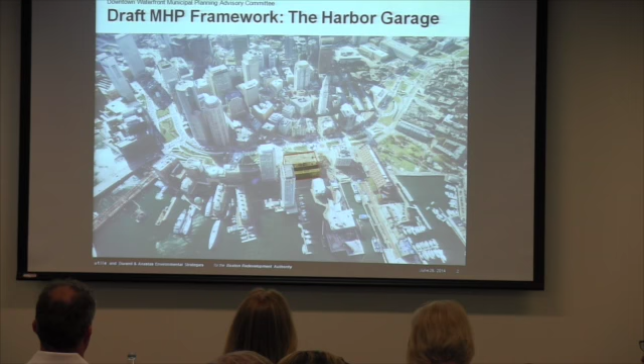Eventually in the harbor planning process, we get to the specific size and height and how close to the water a given project is. Many of my colleagues on the team from the BRA and Utile are part of that discussion. Our job for the harbor plan is to figure out how to convert what you would like to see into an approvable plan.

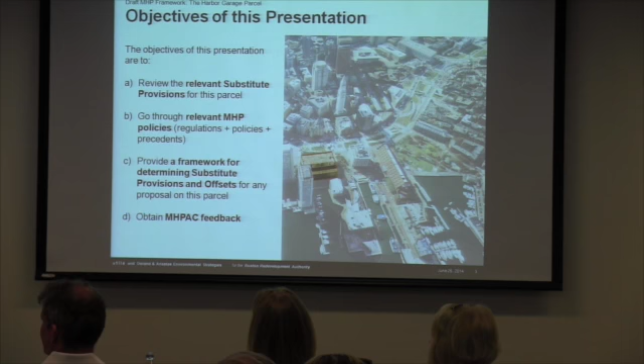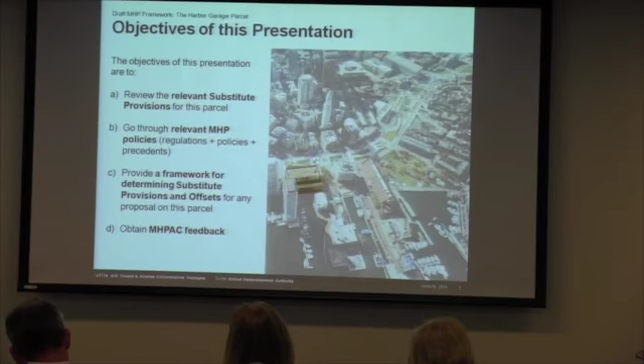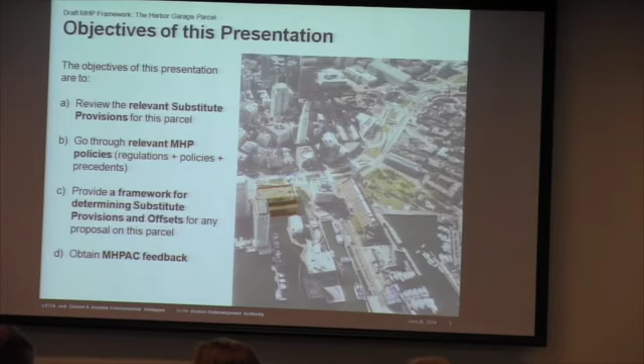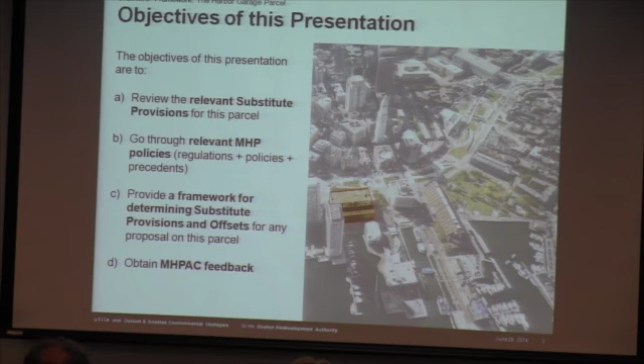Again, one of the questions at the meeting last month was, what do you want from us, sort of as a desperate plea. So I thought it might be helpful to go over the objectives of this presentation. We're going to review the relevant substitute provisions for this parcel. We've done that before, but we're going to do it in a little bit more detail. We'll go through the relevant municipal harbor plan policies, which are based on the regulations and informed by state policies and the precedents the city has established through prior municipal harbor plans. I have 4 slides on the framework for determining substitute provisions and offsets, 2 for open space and 2 for height. Then, at the end or when we have time, we'll get your feedback on the framework rather than any specific proposal.

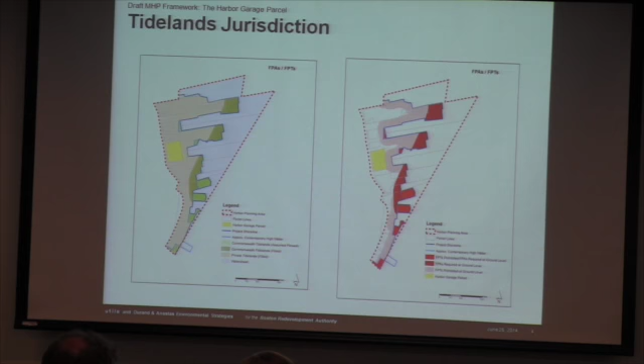In reality, you would probably find on the ground floor of a building like this all facilities of public accommodation, either through the city review process or even through the owner's economic analysis. But from a Chapter 91 standpoint, a large percent of the parcel is not required to have ground floor facilities of public accommodation.

When we talk about the existing conditions, you can see the harbor garage structure right in the middle there. It's a pretty big footprint for the parcel. From city records, the parcel appears to be about 57,346 square feet, of which 57,014 square feet is building footprint, leaving a total of 332 square feet for open space, which is a 99.6% lot coverage. That's quite a bit in excess of what you would normally get under a Chapter 91 application, which requires 50%.

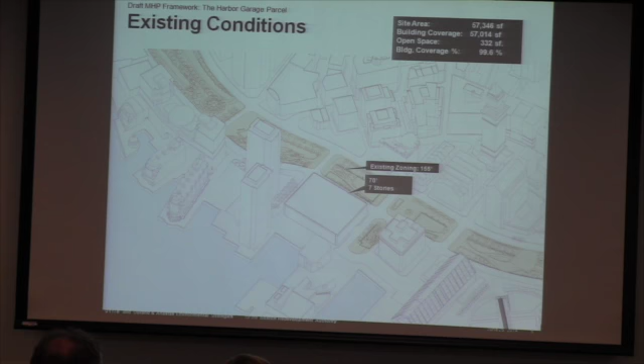In terms of height, the structure is 70 feet tall. Only on the waterfront edge, if this were a Chapter 91 compliant structure, would that be a problem, where height limitations are limited to 55 feet.

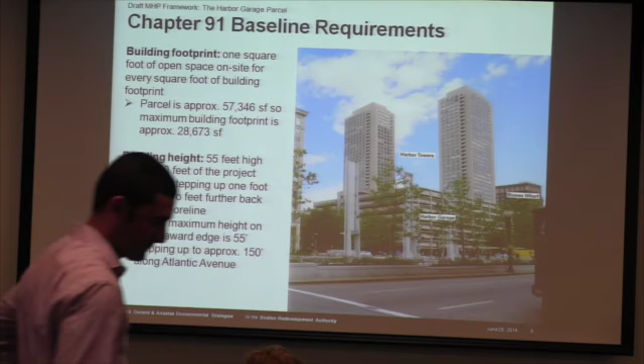Getting to the Chapter 91 baseline requirements and the two dimensional standards that are likely to be in play here. Building footprint we've often talked about in terms of open space. I think it's better to refer to it as building footprint, and we do offsets for building footprint that's in excess of 50%. The regulations require 1 square foot of open space on site for every square foot of building footprint. Where this parcel is a little over 57,000 square feet, that would translate into a little over 28,600 square feet of open space under Chapter 91.

Building height, remember the standard for that is 55 feet high within 100 feet of the project shoreline, and then it steps up 1 foot in vertical height for every 2 feet back from the shoreline. So as you get to Atlantic Ave, the maximum height would be approximately 150 feet.

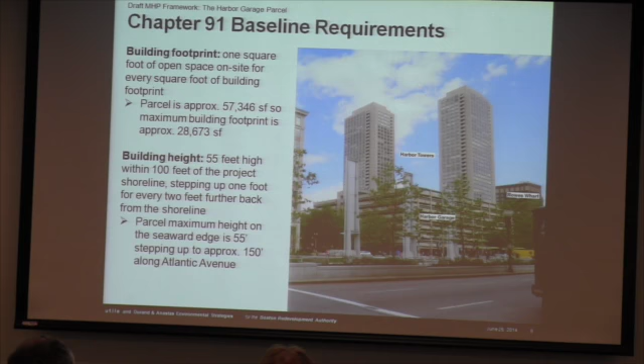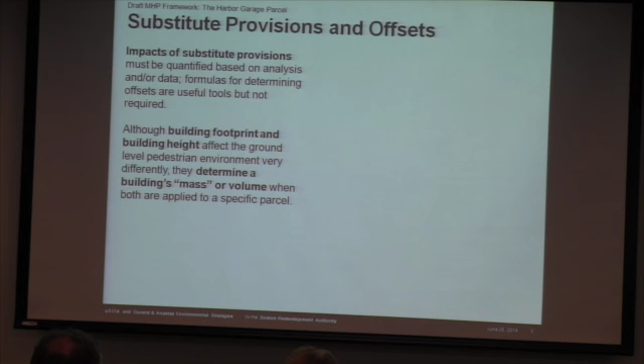Wanted to spend just a minute to go over some general observations on substitute provisions and offsets. We've talked a lot about formulas for figuring out various offsets. It's important to realize that the regulations require some sort of analysis and/or data to analyze any substitute provision. So if you go up in height, you have to somehow do an analysis to see how that impacts the ground level environment along the waterfront. We often use formulas for determining the offsets as well. For example, 1 square foot of open space that you can't provide has to be provided somewhere else. And those are very useful tools, but we don't want to necessarily get wrapped up in the formulas. They're not required as part of the municipal harbor plan. So we have a little more flexibility in terms of figuring out offsets on that score.

We also talk about building footprint and building height very differently, and that's because they affect the ground level pedestrian environment in very different ways and are separated in the regulations. But it's also important to keep in mind that when you apply both of them to a specific parcel, they set the broad parameters for the building mass. How big is it going to be? A very tall building that only covers 50% of the parcel is very different from a medium height building that covers 75% of the parcel. So we have to think about them differently, but in the end game, they come together to help determine how big a building is on a given site.

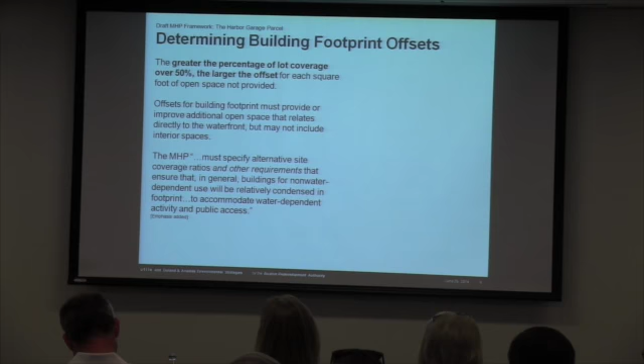So this is the first slide on the actual approach, the framework for determining offsets. And this is a little bit of its policy based on the regs and what we would like to use for this particular parcel and for this area.

We talked in an earlier presentation about having a greater, the greater the percentage of lot coverage over 50%, the larger the offset for each square foot of open space not provided. So for open space, as a project grows above 50%, the per square foot offset somehow increases, whatever it is. If it's open space in another area, maybe you do 1 square foot of open space if it's a 55% lot coverage. Maybe you do 1.5 square feet of open space if it's 60%. Maybe you do 3 feet if it's 70%. Those are made up numbers, just as an example, but it's indicative of trying to provide incentives to keep the lot coverage as small as possible.

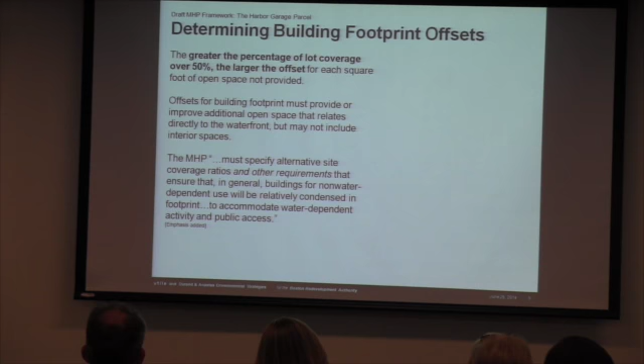Offsets for building footprints must provide or improve additional open space that relates directly to the waterfront, but may not include interior spaces. And then the last one is from the regulations: the MHP must specify alternative site coverage ratios.

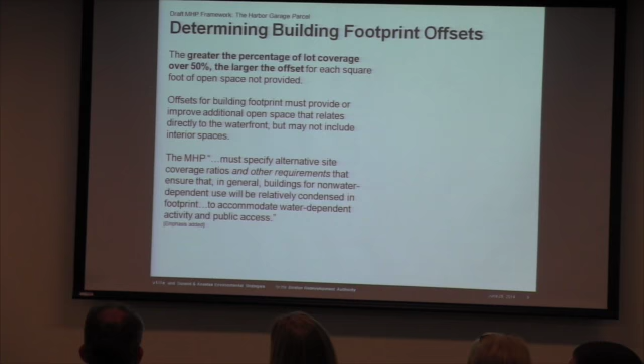That's where the MHP says you can go up to X% site coverage in exchange for doing this offset somewhere else. The important part, which we've italicized here, is 'and other requirements' - meaning you're not limited to just doing that. If you have a parcel or a project that doesn't activate the waterfront in a way you think is appropriate, other steps can be taken to make sure that it is an active public waterfront area.

As we go through looking for building footprint offsets, there's a priority in terms of what you look for. First, you identify potential areas of new open space. We've discussed a couple of areas in terms of parking lots and streets that may be able to be used for parcels in this municipal harbor plan that are adjacent to a parcel or somewhere nearby.

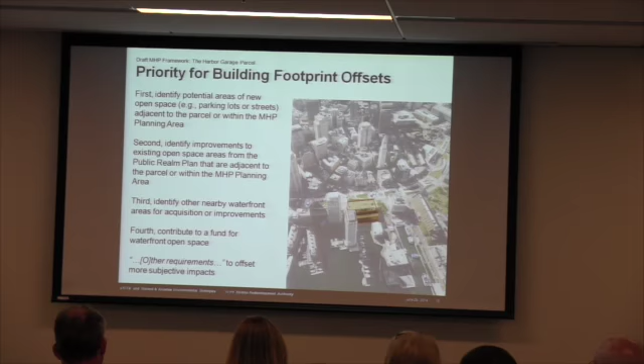Second, identify improvements to existing open space areas from the public realm plan that are adjacent to the parcel or within the MHP planning area. This is a second priority area. Obviously the first, actually getting more open space, is more important.

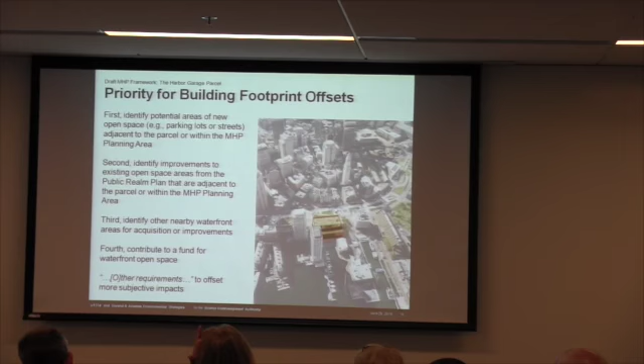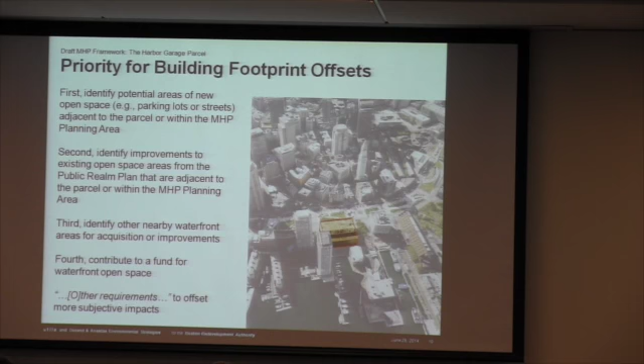If you can't find either of those, the third is to identify other nearby waterfront areas for acquisition or improvements. And then the fourth is to contribute to a fund for waterfront open space. You can't jump right to 4, you have to go through the first three first.

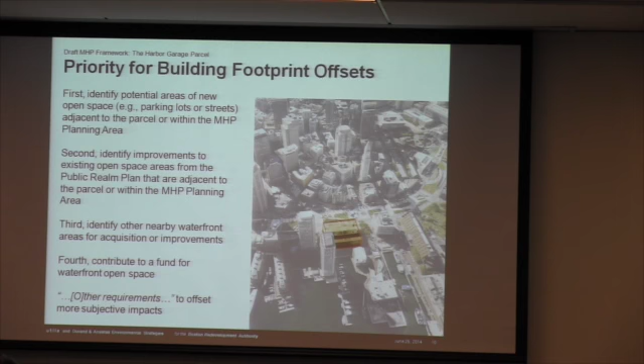The last one I've added is the other requirements from the previous slide. If after all of those things it still doesn't feel like it's a public waterfront, you may provide additional offsets for more subjective impacts.

Moving on to the height offsets. To quantify the offsets for building height, the city has developed a process to determine net new shadow - the new shadow for one hour on October 23rd that would be created by a project above the existing building shadows and a Chapter 91 compliant building on that site.

We have discussed two of the three matrices here before. The first one is similar to the one we have for open space: the larger the magnitude of net new shadow impacts, the larger the per square foot offset. Again, that's an attempt to try and rein in the shadow impacts of a project. If it's impossible to do that, then the per square foot offsets go up.

Also, location is important, with a higher per square foot offset in specific areas of concern, for example public open space. And then a third one that has come out of various discussions with this group is to try and avoid net new shadow in premium public areas through building design and orientation. A couple of the areas we've talked about have been Christopher Columbus Park and the end of Long Wharf.

We also shared with you our thoughts about the public realm possibilities at the Harbor Garage site and how we might best achieve Chapter 91's primary goal of increasing public accessibility to the waterfront. We talked about 3 options for the future of the garage: we could leave it as is, make cosmetic changes, and program the first floor retail; or we could build on top of the garage, adding residential units and maintaining the existing structure as a podium; or we could completely reimagine the site by tearing down the existing garage and constructing an entirely new project. We asked for your feedback, and over the last 9 months, we received it. You liked the creative thinking about the public realm. You weren't very excited about the hot tubs. But most importantly, given the choice, no one wants to see the garage stay. That said, we also understand that there are many who are reserving judgment until they hear about what we propose to replace the garage with.

That's only fair. So today, with the benefit of nine months of discussion as to our collective vision for this part of the waterfront, we're here to begin the conversation and move it forward.

From the first charrette, the process has been about aspiration, about possibilities, about bold thinking as to what the downtown waterfront could be. The public realm plan we've been working on with you for over a year sums it up nicely, and I quote from the city's presentation: 'The downtown waterfront should be a premier waterfront location, a destination in North America.' We shared that vision, and we're committed to creating a wow.

Wow is the descriptor many have used when trying to explain what they'd like to see on the site. As with our initial presentation, we will continue working from the ground up and describe how we think reimagining a site with zero open space today can ultimately provide so many of the benefits contemplated by the MHP objectives and the public realm.

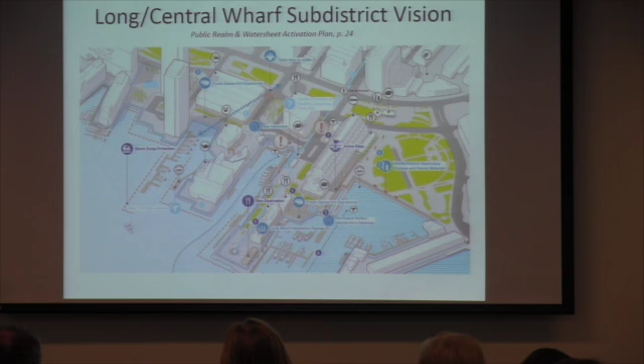The Long Central Wharf Sub-District Vision. This drawing is a reminder of how important it is to preserve issues including view corridors from Milk Street, the Gateway, active retail-heavy programming, and the opportunity to vastly improve the public space between the garage and the harbor, including on the BRA land.

The Long Central Wharf Subdistrict Vision, in essence, is creating an exemplary 21st century waterfront so generations to come can experience the water's edge. The theme is really: touch the water.

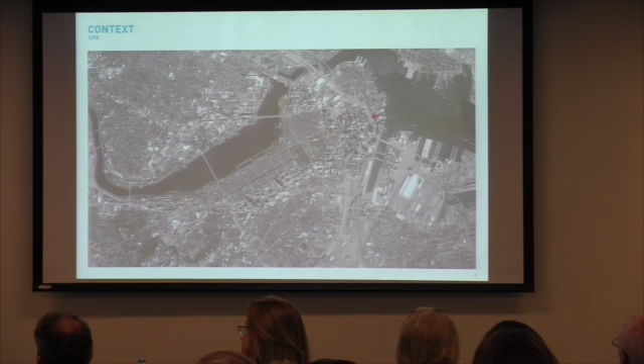Let me take a minute and put the garage site in greater context. If you see the red dot there — as Don mentioned in his opening remarks, in order to undertake the significant investment of replacing a functioning, revenue-producing asset...

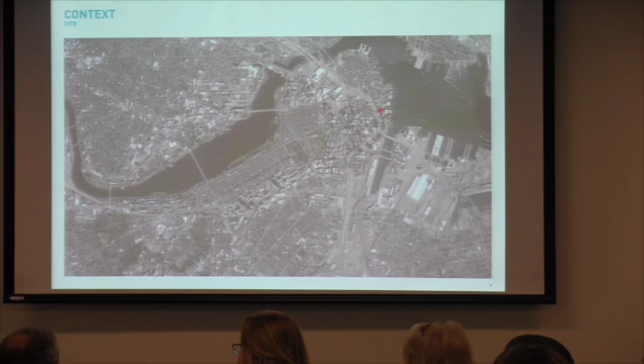By demolishing it and rebuilding it below grade, the new project will be significant in scope. We're not going to be cute today and hide what we believe is necessary to make a difference on this site. So I'll simply tell you that the tallest point of our new project will be in and around 600 feet.

This actually can't be any taller than that. That is, in fact, what the Federal Aviation Administration puts forth as a hard cap on the height of structures in this location. But in order to truly open up the site and do some of the spectacular things we want to do at the ground level, we need that height.

In addition, in order to address the financeable, constructible, marketable project that Don spoke about, we're going to require significant density on that site. To be economically viable, a ground-up redevelopment of the kind we're talking about here will need to contain approximately 1.3 million square feet of gross floor area.

So admittedly, it's not a small project, but that said, I want to talk a little bit about why we think this particular site at this particular time is appropriate for a significant project. This may even be an ideal site for the project we're talking about, and we think in many ways it is — I'll talk a little bit about that too.

So there's the Harbor Garage on the red dot, located with respect to Boston's urban core. It sits at the extreme east edge of the historic Shawmut Peninsula, right on the harbor front. I'll use the slide to reference a planning concept that many of you are familiar with, but perhaps not all, which has particular relevance in connection with the Harbor Garage site.

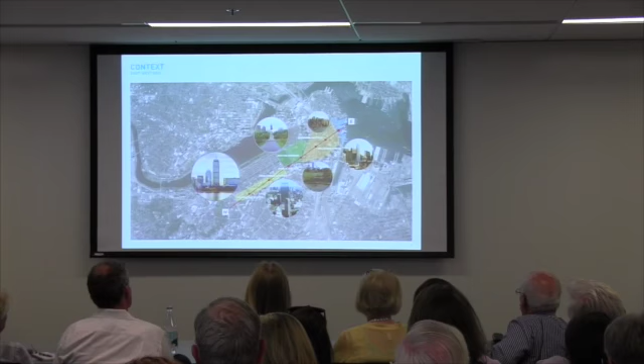So 50 years later, the high spine concept has been successful in many ways in channeling height and density into fairly well-defined corridors and locations, extending on an east-west axis from the Prudential Center on the left to the financial district on the right of the picture in front of you. What's interesting is the precision with which this collection of tall buildings has aligned along this axis.

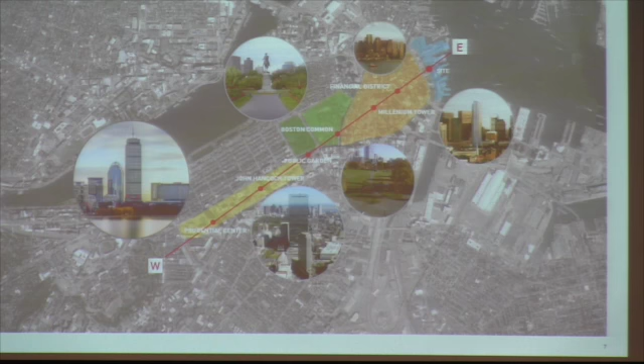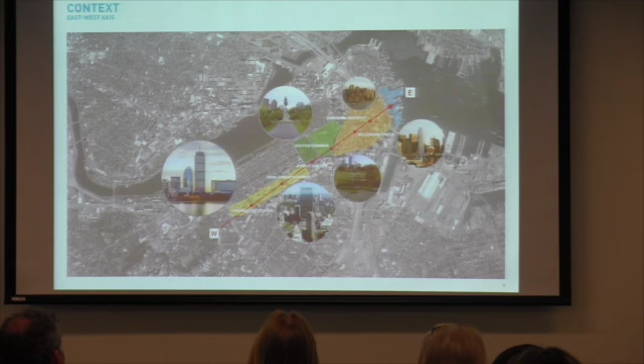A new western bookend was recently spoken about in the Globe, approved for construction at the Christian Science Center complex, a 700-foot plus multifamily housing tower. Moving east from there in almost perfect alignment, the Hancock Building, the new Millennium Tower at Downtown Crossing, and on the eastern end, at the terminus of the spine on the harbor, is the Harbor Garage site.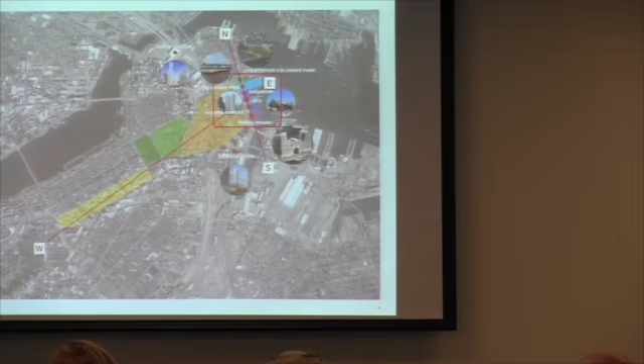If I take a look at this more closely, if I look at the north-south axis, there are actually two north-south axes I'll talk about very briefly.

Within the MHP planning area, the site is at the center of various important landmarks, extending from Christopher Columbus Park in the north to Rowes Wharf and Seaport Boulevard in the south. The garage site is right at the geographic heart of this district, but it also sits in the center of a second north-south axis, which runs along the Greenway from North Station to South Station.

And it bears mentioning that a 600-foot building has been approved at each of those multimodal transportation intersections.

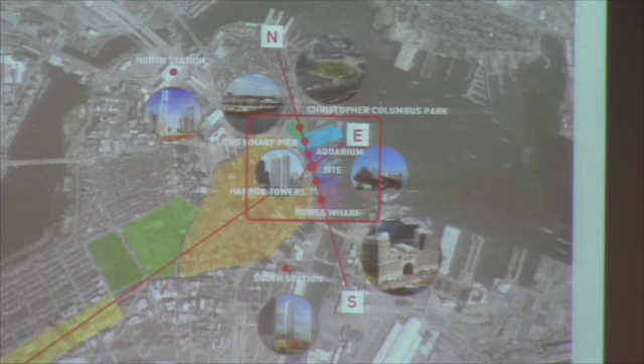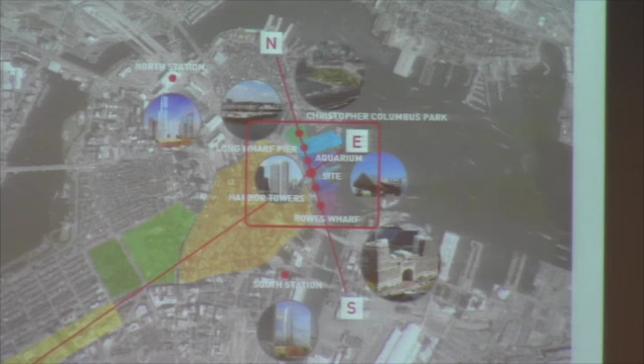The site's positioning within walking distance of each of the city's commuter rail terminals is important for another reason as well. Besides its accessibility to every suburban train commuter from the north and south shores, as well as Amtrak travelers, the garage sits practically atop the MBTA Aquarium Blue Line station, is mere feet from every suburban commuter boat terminal, and is directly across the harbor from Logan Airport. And lest we forget, it's still adjacent and accessible to an interstate highway, only now it's one that we're also pleased is below grade rather than above grade.

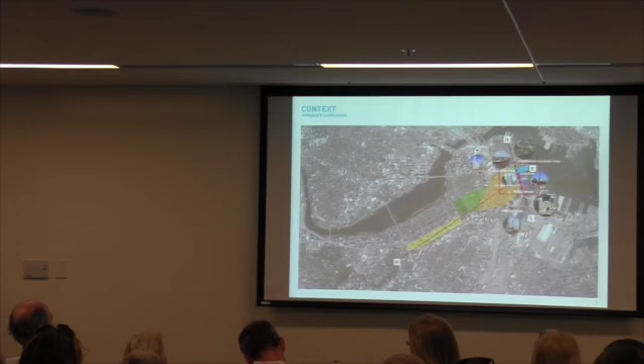The positioning is important because it demonstrates that the site is about as transit-oriented as it can get in our city. And clustering density around transit-friendly sites is good urban planning and good traffic planning, and makes a great deal of sense.

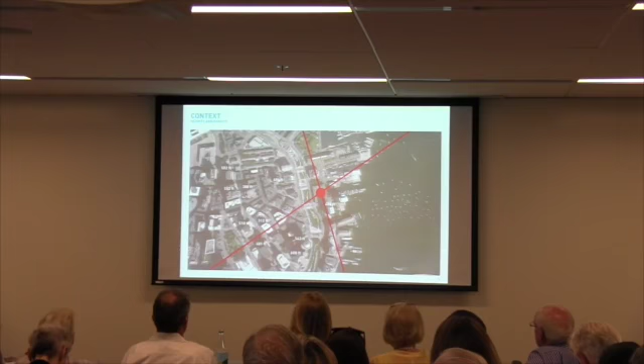Let's take a closer look at the context and the immediate surroundings of the garage site. Here, once again, we see the site positioned at the intersection of the east-west and north-south axes. Directly across the Greenway is the financial district, the most dense neighborhood in the city, and most concentrated collection of height. Within a few blocks of the site are buildings of 350, 400, 500, and 600 feet, with 400-foot tall harbor towers buildings located directly adjacent to the site.

I point this out only to suggest the following: especially now that the elevated artery has been removed, the nearby context of the garage to one side is already particularly dense and urban in nature. If we stand on the roof of the garage and look to the west, there's distinctively an urban scene characterized by both height and density.

There's also a very unique attribute of the site. It's literally surrounded by acres of permanent open space: Christopher Columbus Park, the Greenway, the Aquarium Plaza, the Harbor Walk, the Harbor Towers lawn and pool, and of course the harbor itself. Even by adding an extremely dense project on this particular site, the downtown waterfront is not in any danger of becoming a particularly dense neighborhood.

These next slides will, I hope, help to define what it is further that I was just speaking about. There's a concept emerging in the urban environment called neighborhood density. Density really only matters at one particular site as it relates to the contextual density of the neighborhood as a whole. The slides that I'm going to show you show the following.

Comparative 11-acre areas of the downtown waterfront centered on a hypothetical 1.3 million square foot redevelopment of the garage site, including the immediate environs. The floor area ratios of these comparative analyses is approximately 4.48, 4.5.

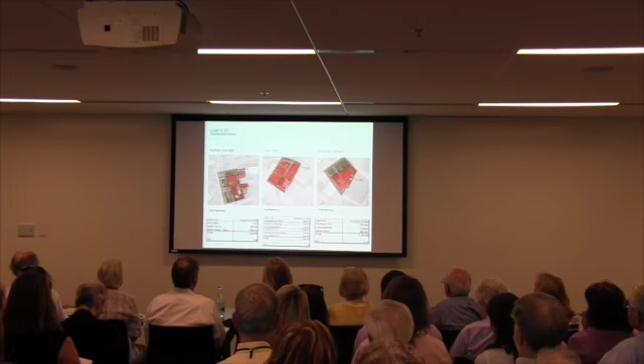But if you just look quickly at the Harbor Garage site, Fan Pier, and Atlantic Wharf, I'll ask you to pause for a second and see the difference as it relates to the density of ground coverage and open space in the Harbor Garage area versus Fan Pier versus Atlantic Wharf. I do that primarily to remind everybody that density and lot coverage are very important concepts.

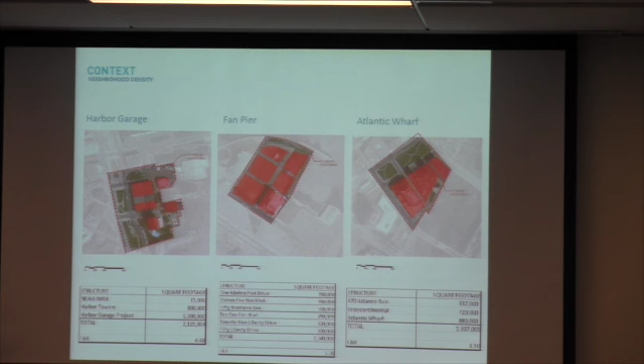Fan Pier is a much larger site, but when you center the 11-acre snapshot like we did for the Harbor Garage on the part of the site where the greatest density is clustered, you get a neighborhood FAR of 5.4. The takeaway is simply that, combined with an extraordinarily transit-friendly nature, the Harbor Garage is particularly well suited to accommodate high densities without fundamentally densifying the surrounding area of the waterfront to an extent any greater than other recent successful waterfront developments.

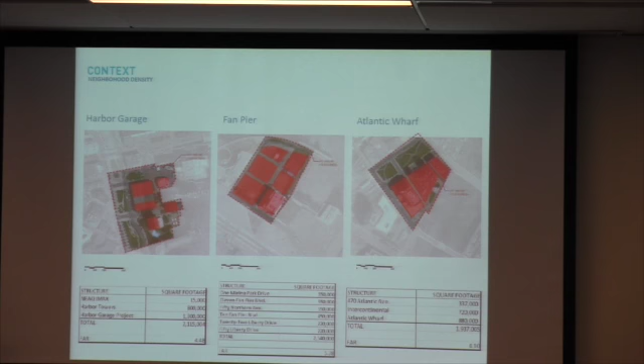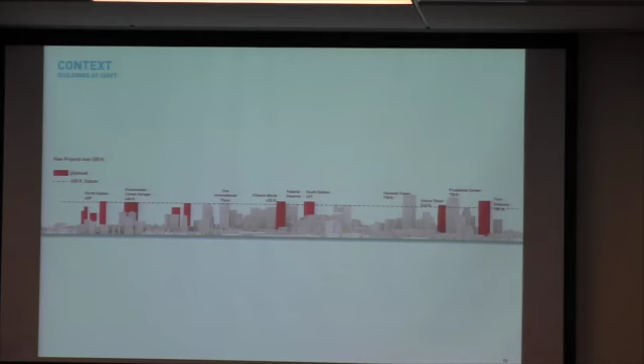I'll leave you with a thought I found interesting, a quote from Robert Campbell, the noted Boston Globe architecture critic, who wrote back in 2006 about the vision and success of the high spine concept. He cited a 1961 report from the BSA's Committee on Civic Design, which said: 'The future spine would be interrupted by two squares, Copley and Park. It proposes that two new ones be added at the spine's ends: one a green extension of Kenmore Square, the other a great south square where the spine reaches the water. We haven't quite gotten there, but Rowes Wharf is a beginning.'

I found that interesting as it relates to how Boston continues to grow and compete as a world-class city, and where density and height come in to allow it to do so. It's my pleasure now to turn this over to Trent to describe our team's vision for creating this great square, a harbor square, a grand eastern terminus for the high spine where it reaches the waterfront, and a bookend to the height and density now being created at the Christian Science Plaza.

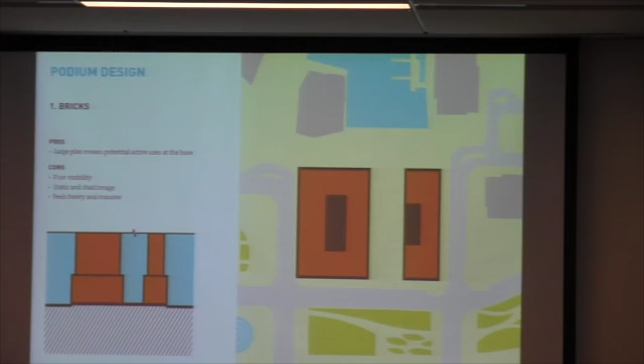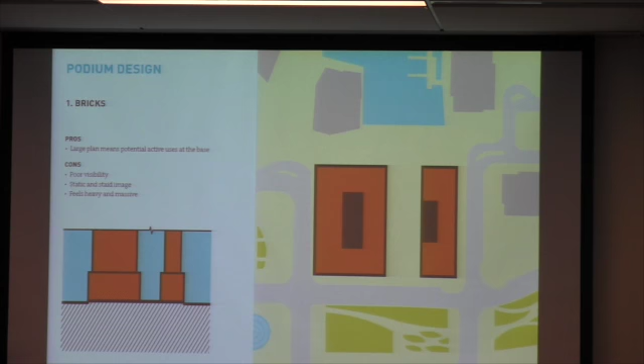How then do we join the program to this specific site, the downtown waterfront? We thought of two contrasting strategies. The first, shown here, we call bricks: a strategy that maximizes the ground floor, biasing internal space over exterior visual porosity. While this has great potential for retail and building lobby, it lacks visual porosity. We also feel this approach presents a static, heavy and massive image for this specific site.

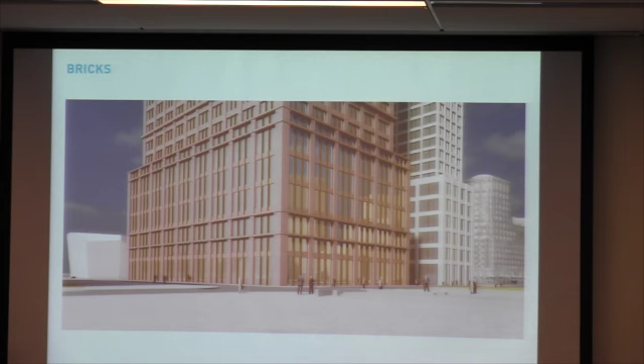Here are a few views we tested to show how this approach would look and feel. We can probably all agree this is not much better than the existing garage. A good precedent in Boston might be the McCormack Post Office, built in 1933, which presents a solid full-block extrusion with very little visual porosity.

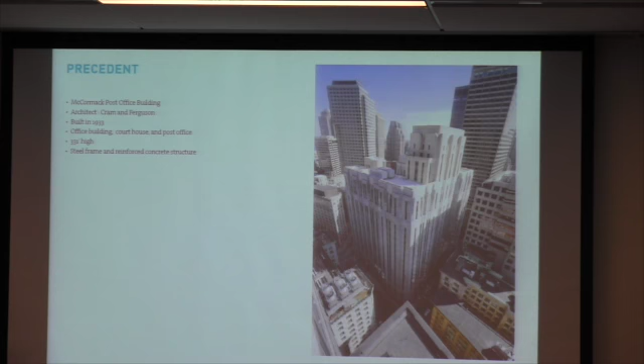At the other end of the spectrum, we have stilts. This method locates the building mass 80 to 100 feet in the air, propped up by columns. Unlike bricks, the majority of the site is open to views beyond, with very little activity to draw you to the site. While stilts may have great promise with views, we find it lacks in engaging the city and may even look like a cold corporate plaza.

We didn't think that this approach would work here for such a vivid and memorable site. It feels rather cold and hostile.

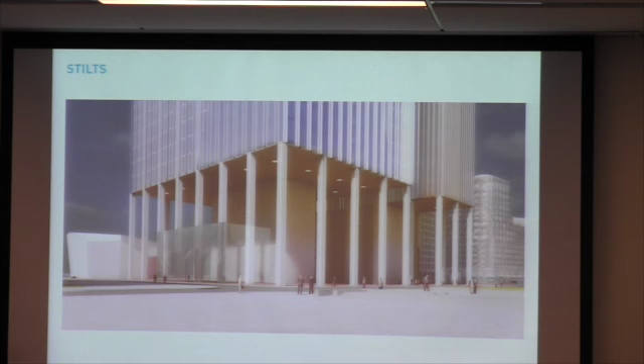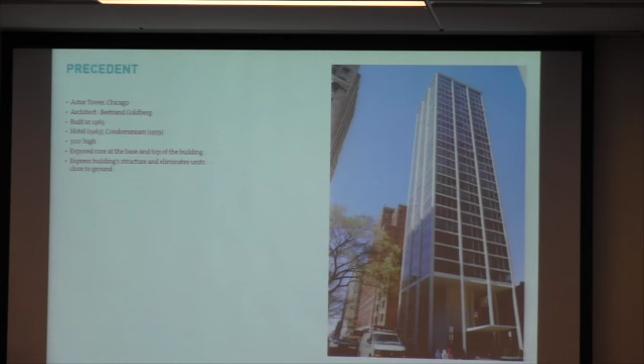To show you a precedent, we found this in Chicago from mid-century modernist Bertrand Goldberg, the Astor Tower. It was built in 1963 as a boutique hotel, serving the celebrity of the day. This design purposely built its first floor as its fifth, relegating the ground floor to columns and a lift lobby.

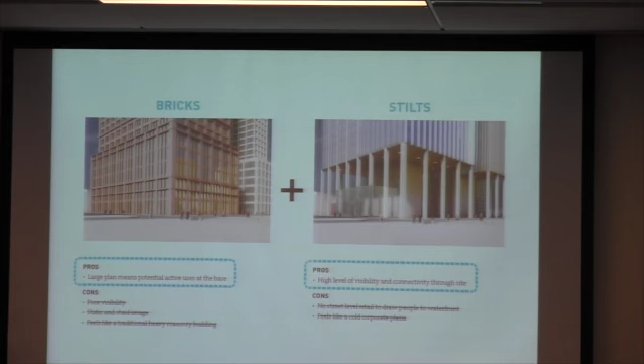Looking at these ideas side by side, we see clearly the advantages and disadvantages. Our job, it seems, is to find a solution somewhere in the middle where we select only the positive attributes of activation and visual porosity.

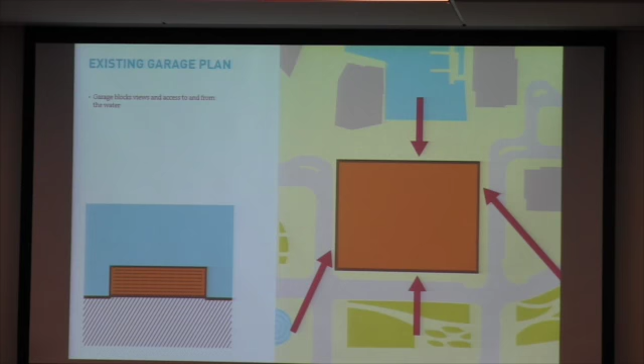The challenge then, for us all, is to synthesize these two ideas of visibility and activation. We start, however, by looking at the real problem of the site, the harbor garage. In this diagram, you see a generic pair of buildings atop a podium of the same dimension as the harbor garage.

The first transformation, the first of a series of transformations, opens an east-west corridor through the middle of the site, on axis with the water sheet beyond. The dimension of the slot approximates the dimension of a typical Boston street.

The second transformation cuts a southwestern corner, allowing views to important buildings around the site. Here we expose views to Rowes Wharf.

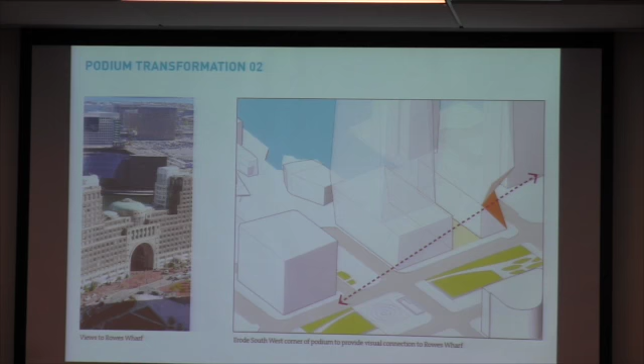The third transformation opens a dramatic view from the northern edge of the site, connecting Rings Fountain to the water sheet beyond. The fourth transformation cuts the southeastern corner of the site to expose waterfront amenities such as the New England Aquarium and the IMAX Theater. We feel this transformation also creates a spatial buffer between the adjacent harbor towers.

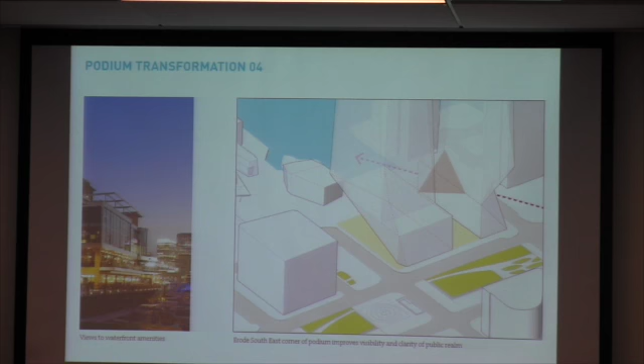Our fifth transformation opens up even further the space at the center of the site. We feel that this transformation will allow greater flow and openness to the site and to the water sheet.

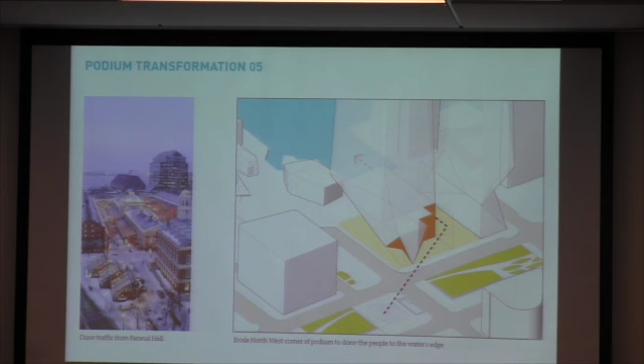Introducing Harbor Square, seasonal public open space, a space to be used year-round. The erosion of the podium achieves approximately 27,000 square feet of useful open space, designed specifically for this site like a tailored suit. At the center of this site, we want to create one of Boston's most used and loved waterfront spaces.

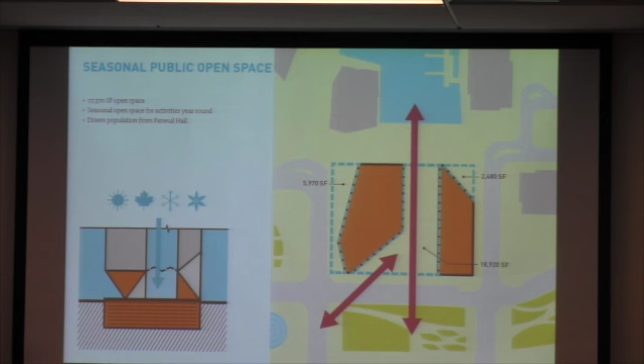Early morning, looking east, we see the sun rise over the harbor. There is a fresh, crisp quality to the air, and spring is in full bloom. Harbor Square is having a flower show.

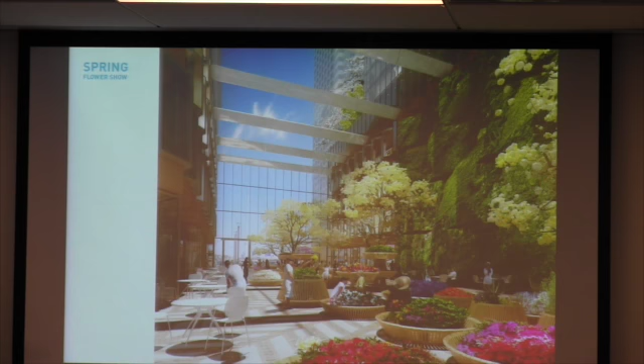And in the summer, a lawn party. And in the fall, a farmer's market. And at the heart of Boston's toughest season, winter, we celebrate the season in a grand space that looks back to the heart of the city.

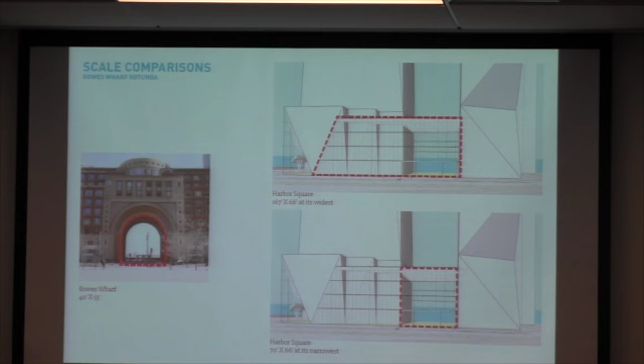To paint a more vivid and accurate picture of Harbor Square, we want to compare it to other places, both dimensionally and spatially. The Grand Rowes Wharf Rotunda is 40 feet wide and 55 feet high. Harbor Square measures, at its largest dimension, 167 feet wide by 66 feet high, and at its smallest dimension, 70 feet wide and 66 feet high.

Harbor Square could easily accommodate the skating rink at Rockefeller Center. Harbor Square has a slightly larger dimension than the Time Warner Center in New York. Imagine here at Columbus Circle, instead looking back to a view of the Grain Exchange.

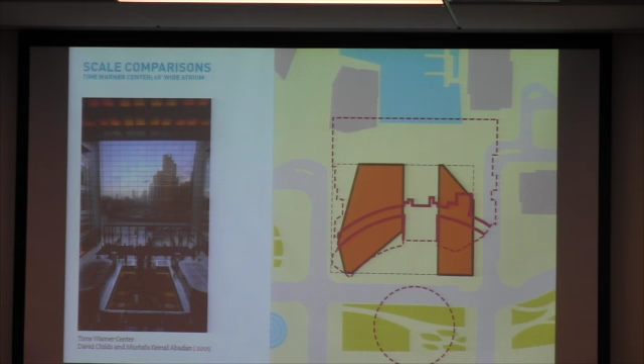Harbor Square is also similar in dimension to the pedestrian space at Faneuil Hall Marketplace, between the Quincy Market and South Market buildings.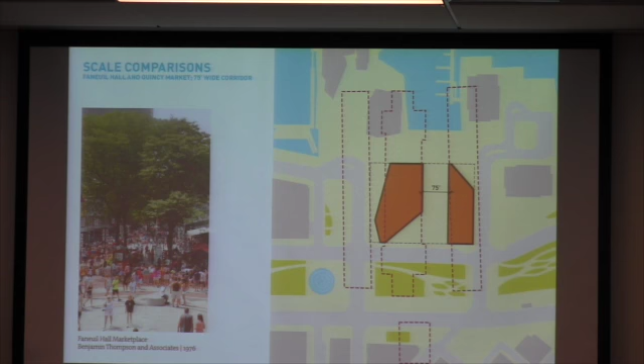The ground floor plan achieves a harmonious balance between built area and public open space. The built space is roughly 29,000 square feet, while the open space tracks 27,000 square feet. Activated on all four edges, the design aims to maximize the potential of the site and heighten the awareness of the harbor.

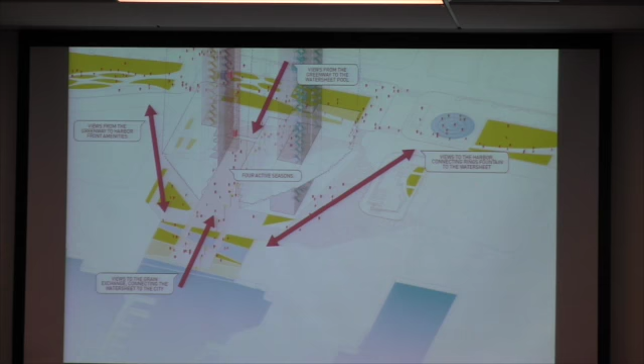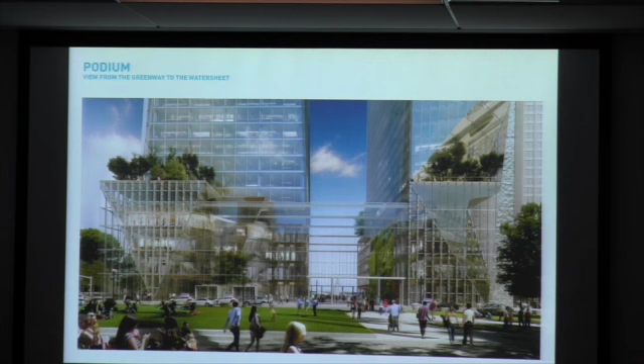The best way to understand the design is a direct comparison of views of the garage's current status on the site and what it could be. From Atlantic Avenue, the garage in its concrete splendor—some of us like it—transformed into something open and inviting with views through to the harbor.

The garage looking southeast at Milk Street, transformed into a building that invites people to pass through and connect to the harbor beyond.

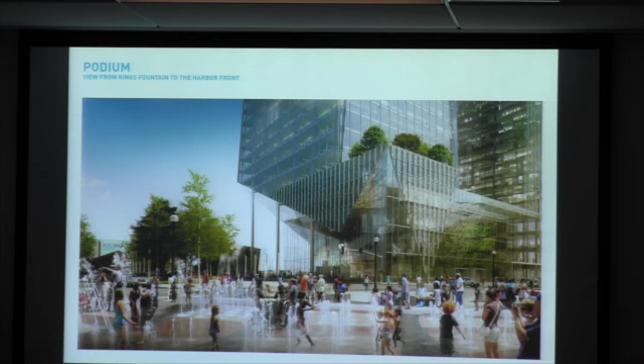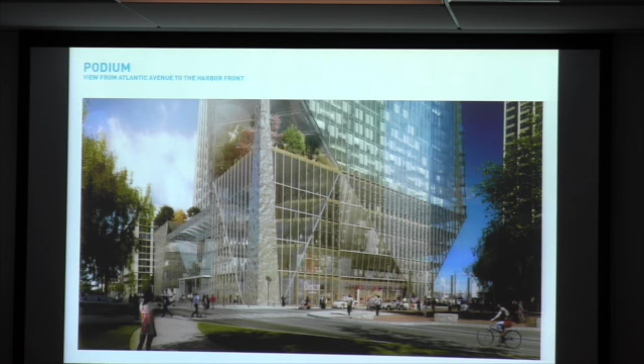The garage looking northeast near the harbor towers, transformed into a building with active edges, rooftop gardens, and openings that allow vistas to amenities beyond. And finally, the garage from the water side, transformed into a place where one can finally touch the water and a place that opens up to the city beyond.

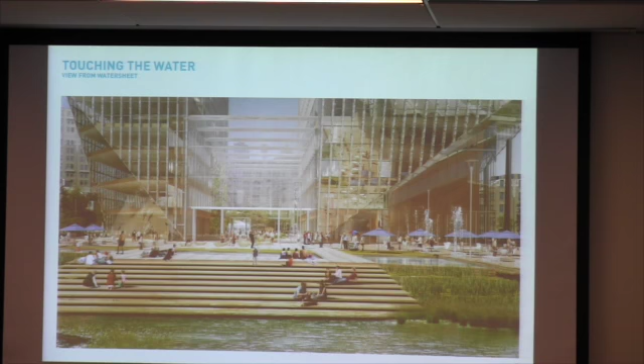Thank you, Trent. I'm going to move relatively quickly through these slides, primarily to make some points that are quite obvious and clear about where we will directly impact, where we may indirectly impact, and where we may, in support with other people in the neighborhood, influence the public benefits received. I'll also talk a little bit about substitutions and offsets.

Looking at some of the documents that came out in the Public Realm and Watersheet Activation Plan, we basically took all of the guideline information and looked at how our project stacked up against it. I'm not going to read these for the next few slides, but I'll pull from it to make a specific example out of one of the things we think we do extremely well.

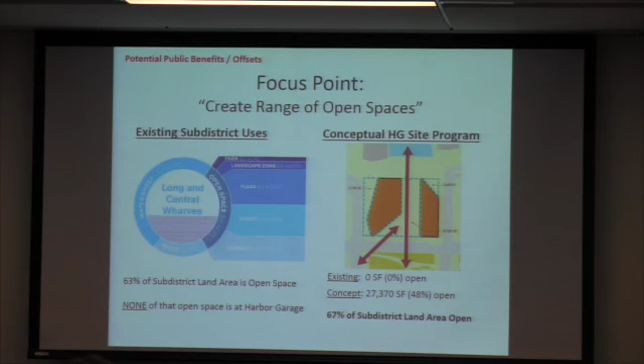So if you take this particular focus point—I have four focus points to cover—it talks about creating a range of open spaces. If we look at the sub-district as it is today, 63% of that sub-district land area is deemed open space. We know that none of that is at the Harbor Garage. The plan proposes over 27,000 square feet of open space, bringing the total in the sub-district to approximately 67%. The vast majority of that new open space is one-of-a-kind open space that can be used all year long.

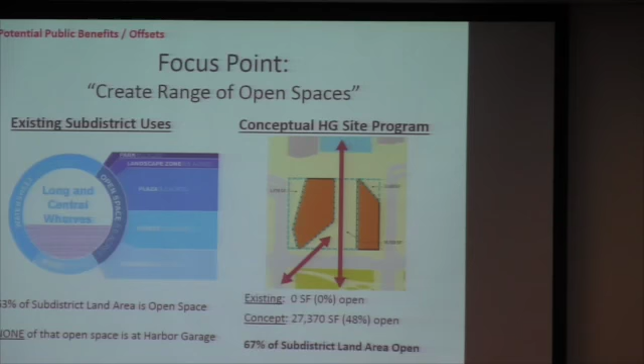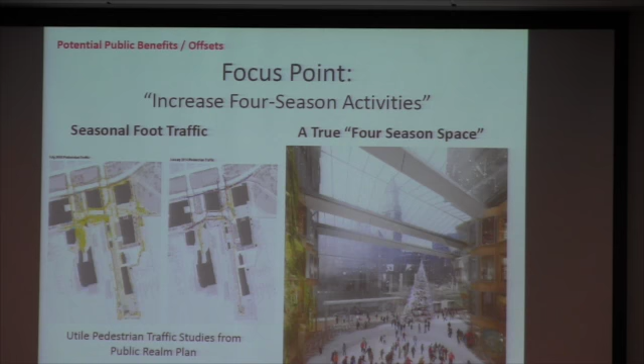We have the opportunity as well to play a central role in realizing many of the district-wide public benefits identified in the Public Realm and Watersheet Activation Plan. Let me talk about increasing four-season activities. We believe our plan is not only unique, but will enrich the significant pedestrian traffic with true four-season space and very exciting and appropriate programming for the public realm.

Likewise, creating view corridors to the water—we believe we support these benefits, including those view corridors, and I don't have to restate what Trent already showed you, that we have a significant number of new access points, physical and visual views to and from the waterfront, and to and from the waterfront back to the Greenway and back to the city.

We also believe we have the opportunity to help with the activation of underutilized parcels, in particular the Long Wharf parcel. For example, we can assist in the conversion of the Long Wharf parking lot to a park, and we are in a unique position to do so, as we could possibly accommodate the cars that park there now in the new underground garage we've talked about so far.

There is no question in our mind that the 21st century climate change resilient waterfront is an absolute requirement for going forward cities, as it relates to competing and to value—not only how we address the waterfront specifically, but also how we employ evolving state-of-the-art and continually dynamic site measures like elevated, protected, and redundant mechanical systems, and a wide range of other measures fast becoming industry practice post-Sandy. Our city is taking that extremely seriously at the leadership level, as are all the design professionals in the city. Certainly Trent's team in New York is well versed on these issues as well.

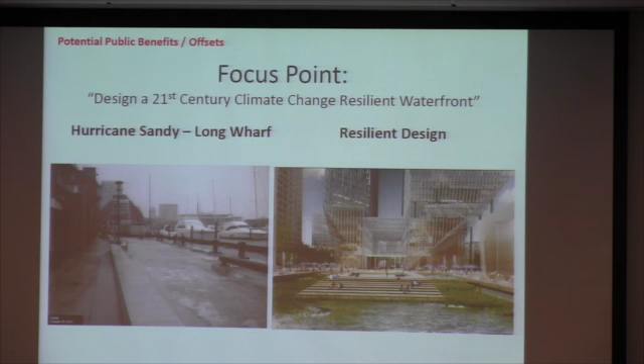These are just some of the ways we think the removal of the garage and the development of a new 21st century mixed-use space at Harbor Garage can help meet many of the public realm benefit goals identified in the plan. Very quickly, benefits on the left—we talked about every single one of those—and some potential offsets on the right. We can't promise all of these things at this point in time, but we're quite convinced that the project we're envisioning has the ability to do the things on the left directly, indirectly, or with support from others, and the significant number of potential offsets on the right is where I'll leave it.

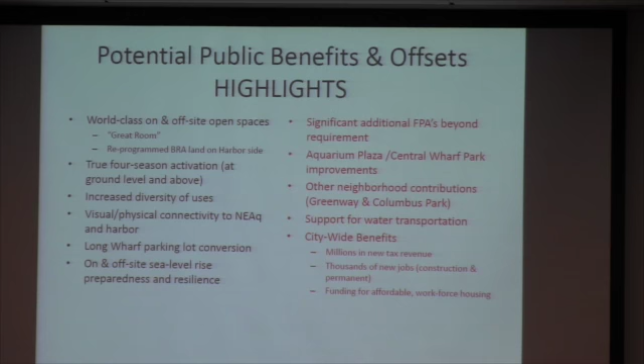As you can imagine, this is an incredibly exciting time in our neighborhood. For over 25 years, Ted and I have spent our days and many long nights in the community. We've watched it transform before our eyes, and we're committed to doing our part in a continued transformation.

At International Place, we've rededicated ourselves to offering amenities like the Palm Restaurant that support a first-class business environment, but also contribute to the community. Meanwhile, at the Harbor Garage, we've been working to make small changes that make a real difference. Design Museum Boston joined us this past winter, becoming the 7th exhibiting museum within a square mile, but the first open on the Greenway. And just last week, Marshall's Farm Stand began offering its selection of fresh local produce for the summer season.

As you can tell, we've been focusing on reimagining both International Place and the Harbor Garage. This municipal harbor planning process presents us with a truly historic opportunity to imagine the possibilities for creating the exemplary 21st century waterfront. The BRA and Utile have done a fabulous job of distilling the community's feedback into a public realm plan that, if implemented, will result in a downtown waterfront that will serve as an example for the world. And we know that the Harbor Garage redevelopment project can and should be the driving force in the plan's implementation.

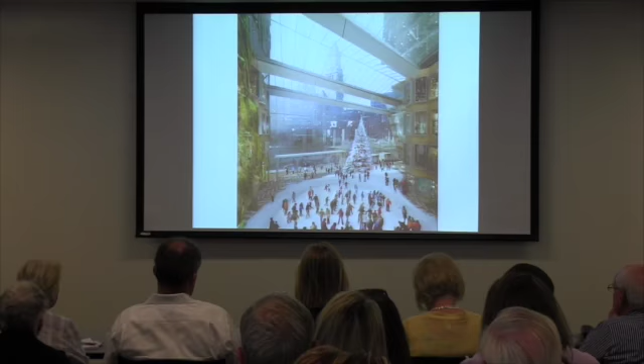Imagine a place that contributes a dynamic mix of uses to the most mixed-use district of the city. Imagine a project that converts the vision of the public realm into reality, not in decades, but today. And imagine a catalyst that not only brings unprecedented benefits to the waterfront, but also generates millions of dollars for middle-class housing and other worthy initiatives across the city. All of this is what we imagine for the Harbor Garage site. We're still only in the early stages, and so we invite you to imagine along with us.